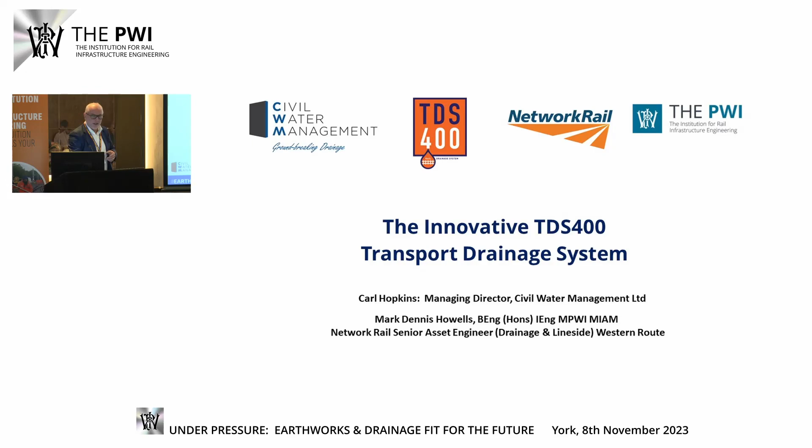So it's essential that you surround yourself with the right people. I have a non-exec director, Paul Withers, some might know, of HBPW Consulting, a risk accredited consultancy in Retford. And Paul is 40 years a chartered civil engineer. So straight away, any projects that come through to us, we will assess what those projects are and look at how we can value engineer with a potential new product that is going to change things. On a day-to-day basis, Patrick O'Neil, my technical director, has helped unlock what I'm about to show you.

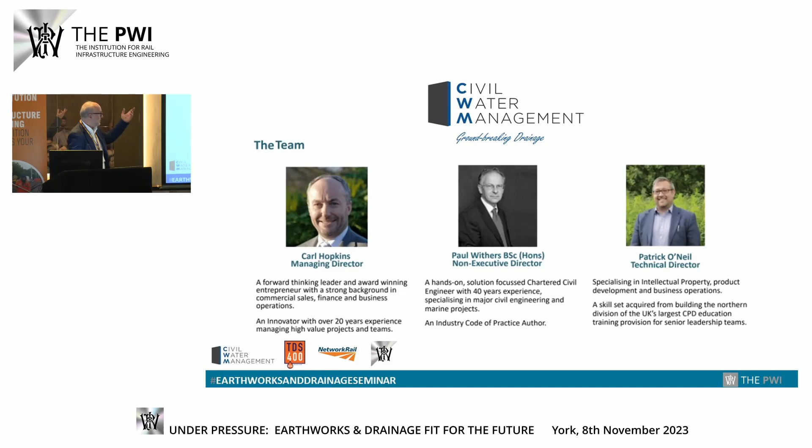So what is the cause of all this? Climate change. We've heard about it all morning. And the three key elements that I picked up on this morning were surface water, SUDS, sustainable urban drainage systems, and attenuation. And invariably, when we look at the track, and not just the track but off track, it's how do we divert water? How do we move water around when, in a lot of instances, you've got very narrow entry points? You can't always get a pipe in there. Pipes aren't always the answer to everything, and they can be very rigid in what they do.

So, as we see more frequent flooding, heavier storms. And when you look at that, and I saw some of the pictures that were shown before, the water can't get through the ballast. The ballast is silted up, stuck. Won't let that water through. So how do we release that water? Because there might even be good drainage systems in there, but it's just not getting to it.

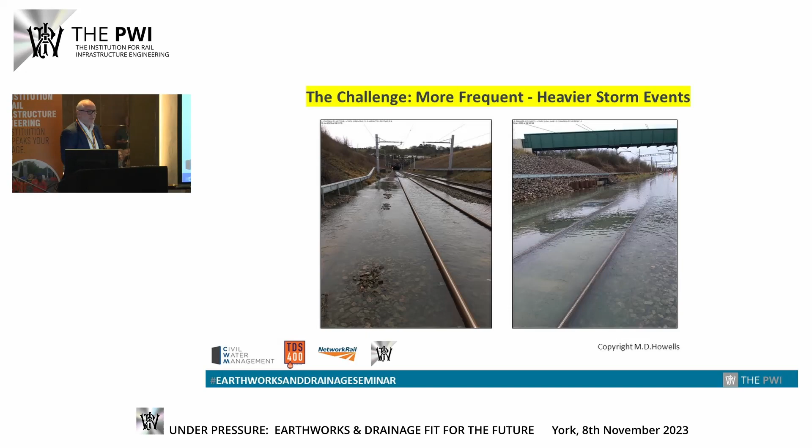Ta-da! TDS 400. I never travel anywhere without it. Especially when I was coming to York today, I thought it's bound to be flooding in York, so at least if anything happens, I can attach it to the soles of my feet and walk over with drainage flowing on the subbase, which is an apt point, because that is exactly what it's about.

It's about letting water through; it keeps an open pore, keeps that open void. So that's going nowhere. Okay, and you can put 1, 2, 3, 4, however many you need, and the K values and all the hydraulic information is all there to support it. So the water will literally, through hydraulic pressure, be forced through the panels and it meanders through. People go, doesn't it silt up? Well, the good news is no, it doesn't.

We've worked with academics. The Tuffley case study, which Mark is going to explain shortly, has been in nearly 5 years, and it is proven. This is just in the rail industry. I've been working with polymeric waste for over 20 years, and from the early prototype stuff, I've got stuff in the Olympic Park that's working as good today as the day it was put in. So some of those questions, well, we don't want to be first. Well, the good news is you're not. It's most important that we build on what we've done, and we do have good evidence.

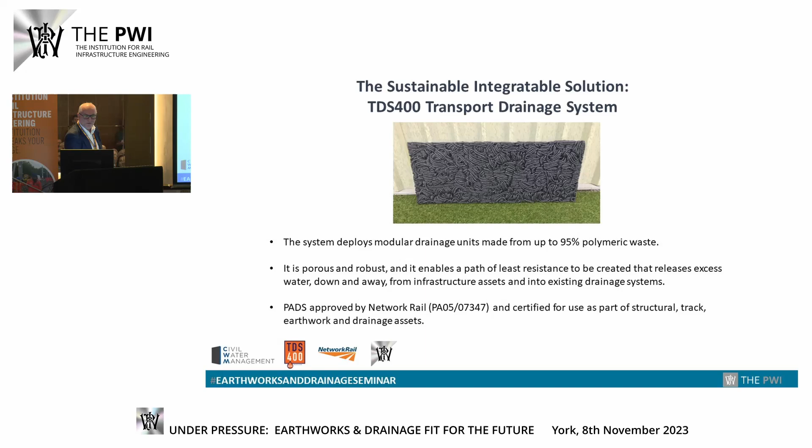But it's also really important that we look at how we work within the engineering standards. And it is absolutely about taking into consideration the existing drainage systems that are there. We are not about just saying that comes out and ours goes in. It's about how do we work with it? So in the examples where the water's flooding the track, you could insert TDS 400 in there and get the water to the drainage system without ripping everything out.

We can reduce trench sizes. A 600 trench comes down to a 300 trench. You think about that just in terms of excavation. It's immense. You're not having to use as much ballast. Ballast is massive on CO2. We've basically got a paradigm shift the other way because we're getting rid of what would normally be very difficult plastics that would go to landfill.

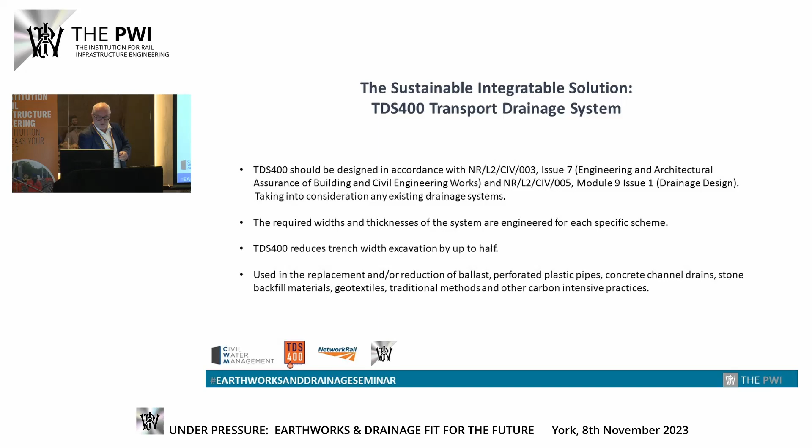So when children turn around and say, what are you doing in your daily activity about climate change? Well, I'm turning it into drainage. I'm doing it. This is live. This is happening today. Okay? It's really important that we see this action to impact on climate change. The recycled polymeric content: 95% recycled content, all UK sourced, which is even better still.

It keeps this open environment and it's all recyclable. And when you look at traditional excavation versus TDS 400 excavation, just in that 600 mil being reduced down to 300 mil, the tons of rail ballast excavated goes from 315 to 155. That's just excavation on that one bit.

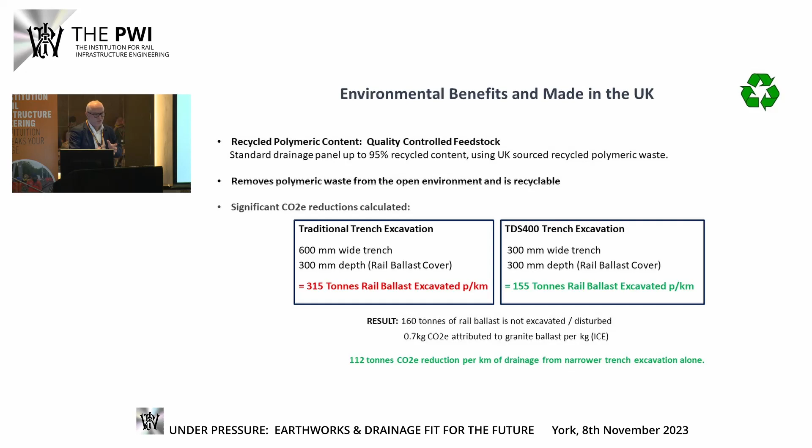When you start scaling these numbers up, the 112 tons of CO2e reduction per kilometre of drainage just because of reduced excavation. Massive impact. So if we look at the rail landscape, the important thing to us is how it's all connected up. We've got the drainage connectivity and the network resilience. And we basically split it into 4 key areas: the land boundaries and earthworks, the rail assets and structures, track and trackside, and track bed and formation.

So we cover many applications right across the network. But it's absolutely critical that you look at it as a whole. I'm not everything to everyone. TDS 400 is not everything to everyone. It is part of a new tool that you can put in your drainage toolbox and say, how about this? Because it might just add value to what we're doing, or it might actually just put some resilience into the network. It might actually bypass a failed drain without having to rip it all out.

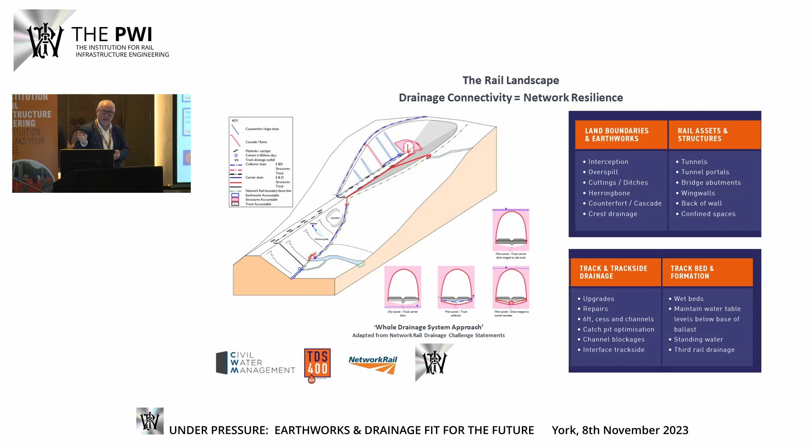There are different ways it can be used. It can be applied in all sorts of very successful interventions. So 3 sort of interesting points here. So the one on the far right there was Crewe, and the reason the panels are laid flat is that there were metal stanchions there and they couldn't get drainage through them. So what are we going to do for drainage? I said, well, lay TDS 400 flat. Because if I put that on the floor, the water's still going to go underneath it. It's going to travel through it. And actually right now it's solved a problem that they had in the area of the drainage.

I was speaking with the guys that put it in the other week. They said it's actually solved that problem. So they said, we're really grateful. He's now come back onto me again. Pill tunnel in the middle, that had big issues with contamination into local farmers' lakes. And by front loading and acting as a filter, we took a lot of the red oxide out. And so it's now clear. When we saw the bottles, they're absolutely crystal clear. The guys rang me up and said, I'd like to drink it, Carl. I can't, but I said I would like to drink it, which is really good.

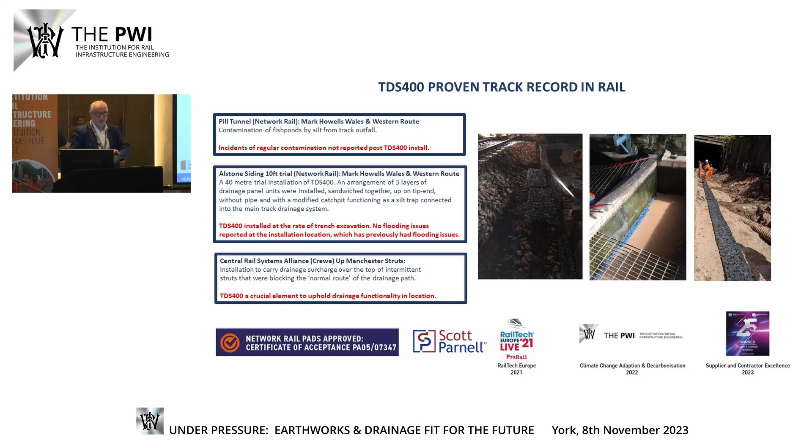And then these Central Rail Systems Alliance. Oh, sorry, that was Crewe. Alstone Siding is the other one. That's still an ongoing project. We put in a 40-metre stretch down there, which I think is on that slide there. And that was actually to look at lowering the water table, so a high flood area. So by getting the water down, basically putting the product on its tip end to get the water to lower, and that's still being monitored right now.

So in terms of cost-benefit analysis, 30% cost savings against traditional methods. If you used a ballast vac, it can be up to 50%. So depending on the methodology of what you install, it can really make quite a big impact in terms of the overall budget.

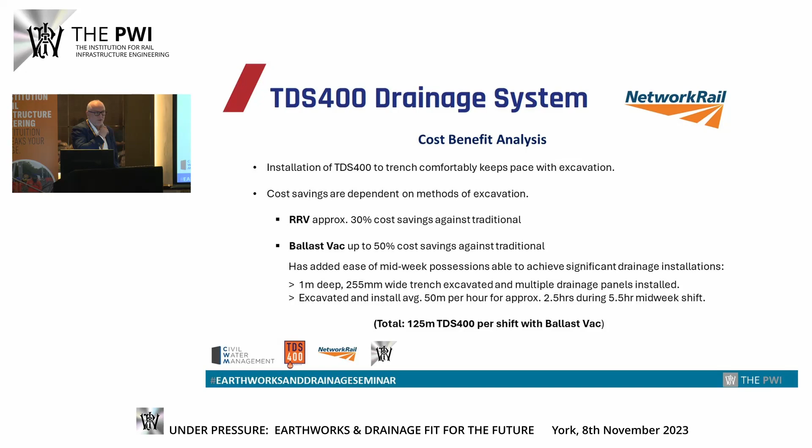So without further ado, I'll pass you over to Mark in 1 second, but just on the 650 metre stretch at Tuffley, which Mark's about to tell you about, if you actually extrapolated that out, a 33 shift cycle would come down to 7 shifts using TDS 400. And we noticed it literally goes in at the speed of excavation. So it was really significant in terms of how it can really take out a lot of cost. And more importantly, better utilisation of resource.

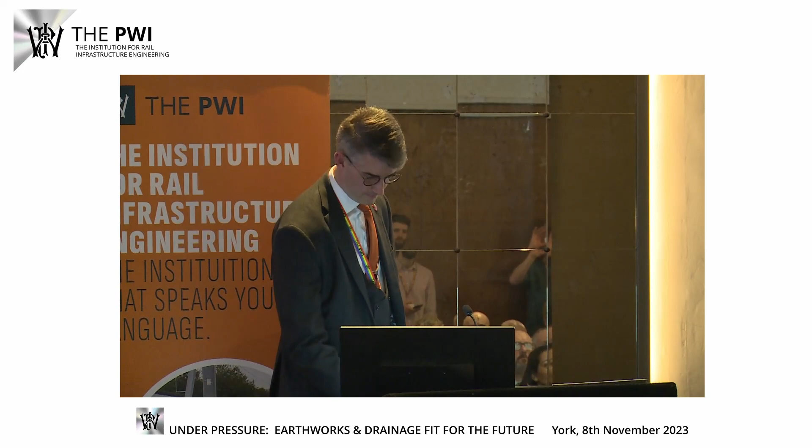So thank you, Carl. For those who don't know me, Mark Howells, I'm the Senior Asset Engineer for Drainage and Lineside on Western Route. I'm going to talk to you for a couple of minutes about an application of TDS 400. So, as Carl said, it's not the solution for everything. This particular site is near Gloucester, so it's on the Bristol to Gloucester main line. Nearly 5 years ago, we instigated this work. A failed drainage system that needed to be remedied. We needed to find a drainage solution to raise the line speed.

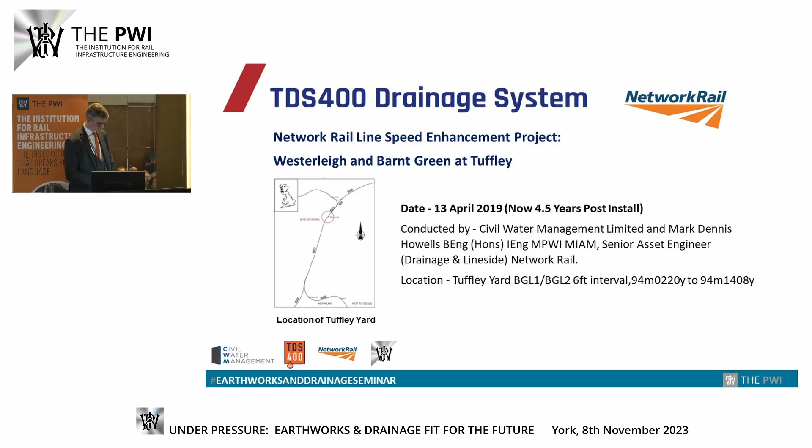So just thinking about the existing drainage system, we had a drainage system in the 6 foot between 2 lines. This is a very idealised cross-section. I didn't have time to whip up a section for Tuffley, but this gives you the concept idea that there are 3 layers of TDS 400 on their side, far on the right-hand side there, and a layer of TDS 400 laid on its side. So the drainage assets are in the middle. The concrete pipe protection blocks are there. In terms of photographs, it was not me that took the photographs on the night.

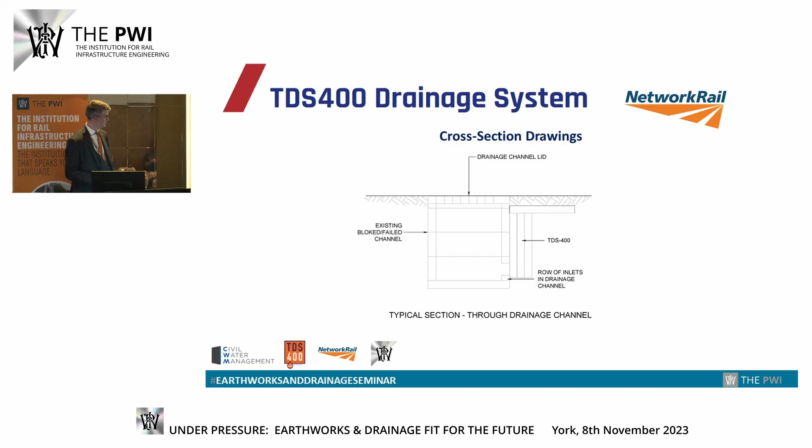I wasn't able to get there, but Sysrail helped Civil Water Management to install this. You can just about see on the bottom right of the picture that there are concrete pipe protection blocks. Now those are protecting the clay pipe that's already in the ground. Nothing particularly wrong with the clay pipe from the CCTV survey that we did, but water couldn't get to the drain. So that's where this product came in, and we were able to get water back into the drainage system.

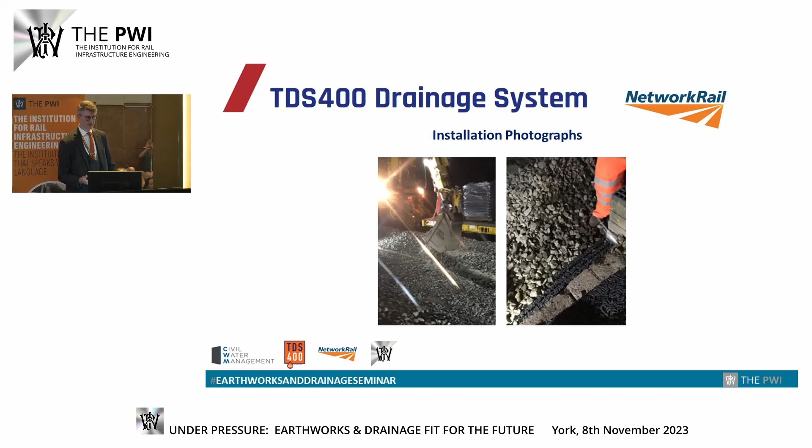You can see there the machine just taken off the ballast. Again, it could be delivered by hand. It doesn't need to be delivered by machine. Again, really good shots here of just that TDS 400 going in on its side, and then the panel laid laterally. So that's encouraging water to get from the formation into the drainage system, which is the concept here, is the idea.

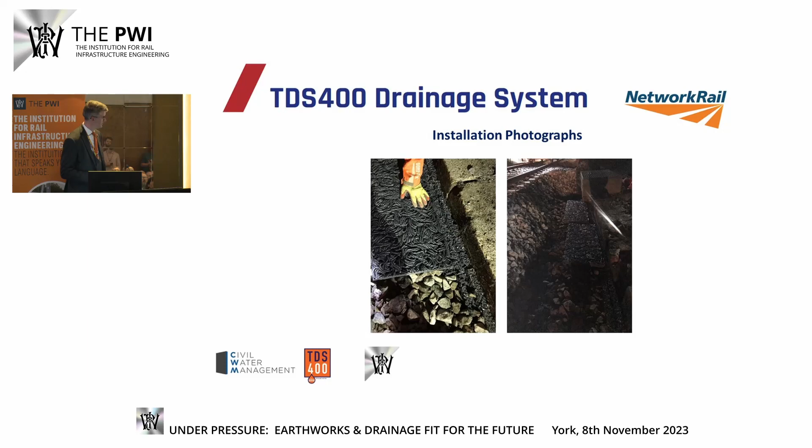In terms of just some of the site conditions, this was pre-work 2017, so it's been a long-standing issue, always been failed formation, very cohesive material, lots of clay fines. You can see that would clearly cause cyclic top. There's cant issues with cant being all over the place.

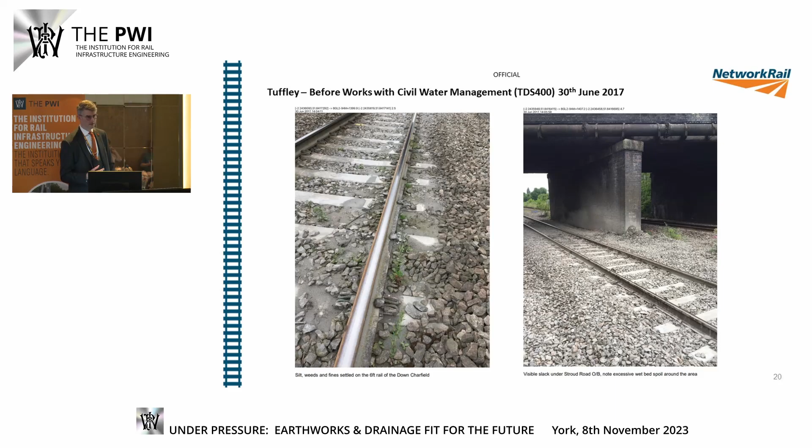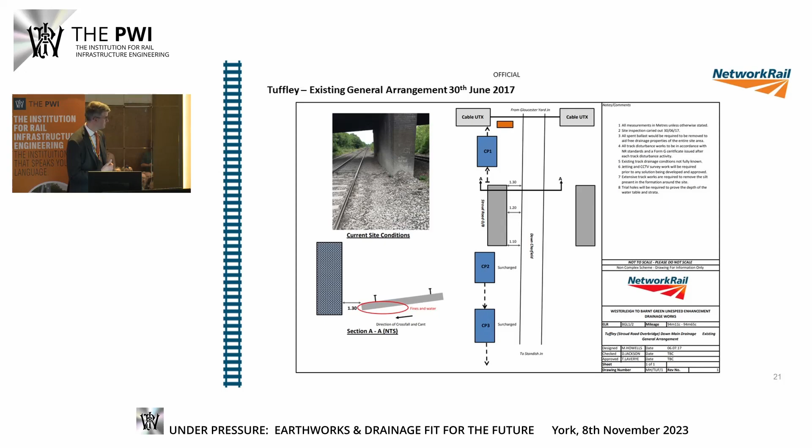Assets in Ellipse, for example, when we went back recently, double checking the asset condition, doing condition scripts in Ellipse, it's all part of the system. So you can see there, that's what we had. This is the site visit that I referred to just a moment ago, very recent with Carl. Unfortunately, we didn't get the line blockage that we requested, but we did manage to get to the side of the track. So you can see same site, same position, same sleepers, same components,

definitely different ballast. We've dug the ballast out, so the local P-Way team helped us dig out the ballast post the work. And since that time, 2018, we've seen no deterioration in the track. We've basically seen that actually doing this TDS 400 trial and getting water into that existing drainage system has helped to resolve the issue here.

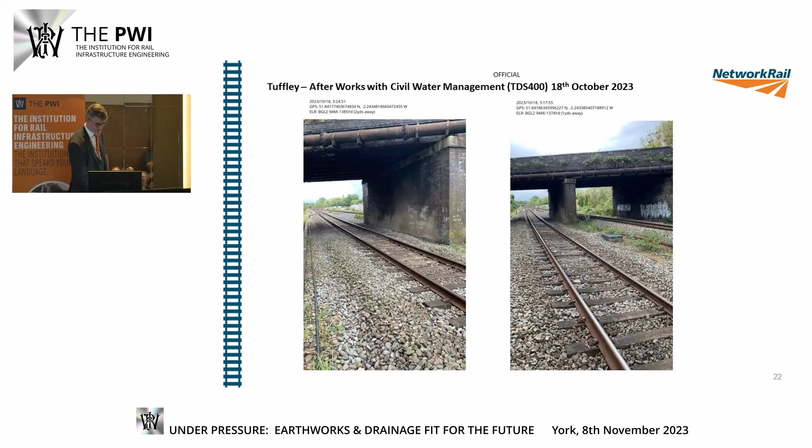Now, as Carl said, it's not for everywhere. It doesn't solve every issue, but I genuinely see it as an opportunity to help us where we don't want to just rip out the existing system. Think about the embodied carbon that we would have had if we'd have ripped this system out. By not ripping it out, we've saved a lot. That's kind of the summary of where we are. Track quality hasn't deteriorated.

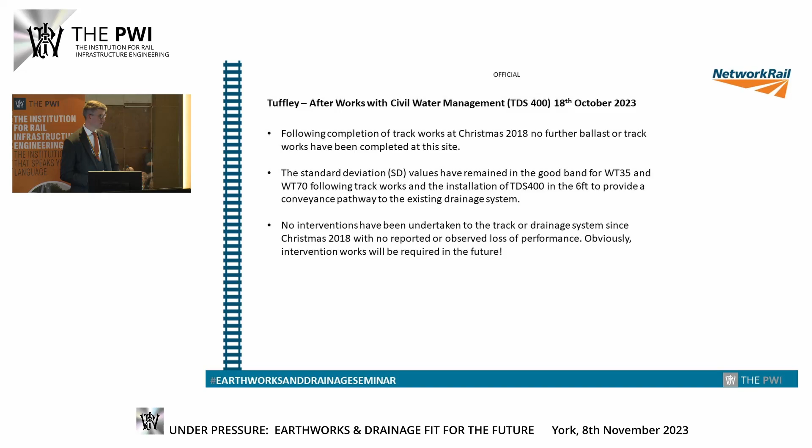Hopefully, we will see in the future that we can deploy this technology and this product more widely. But basically, although we've reduced, as Mohammed said in his presentation, the rate of degradation, there will always be a need for maintenance, there'll always be a need for inspection, but it's just trying to get the water into the drainage system, and it can help solve some of the issues. So I think, without further ado, I'm going to pass back to Carl, and thank you very much.

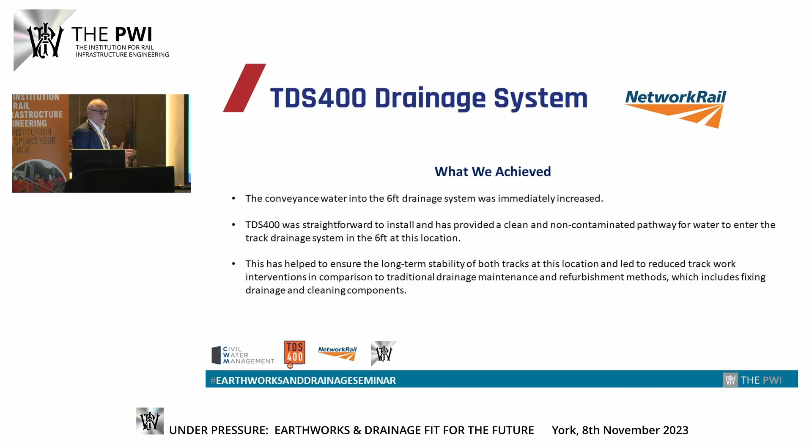So thank you, Mark. So really when you are bringing a new product to market and you can get into a trial like that, and just short of 5 years, we've really made an impact with what was a challenging wet bed without it being dug out. That's really quite satisfying.

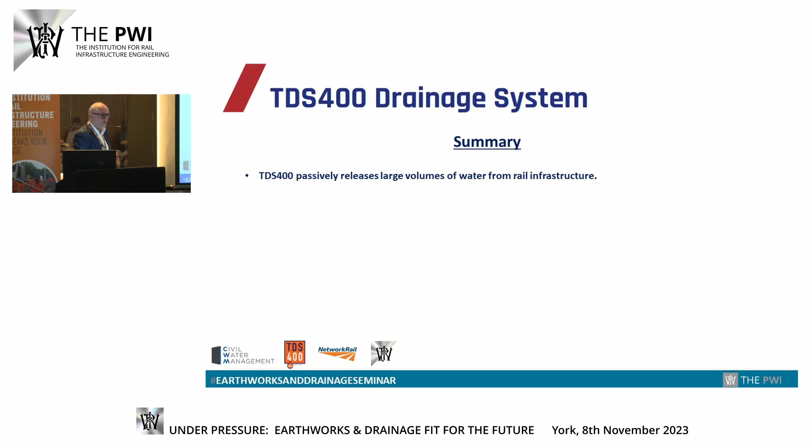This is the key point. It passively releases large volumes of water. So it's not waiting for a 100-year storm. It's doing it all the time, 365 days a year, 24/7. It's just moving that volume. It keeps those crucial pathways open, and it's constantly releasing that water, unlike a pipe, which doesn't.

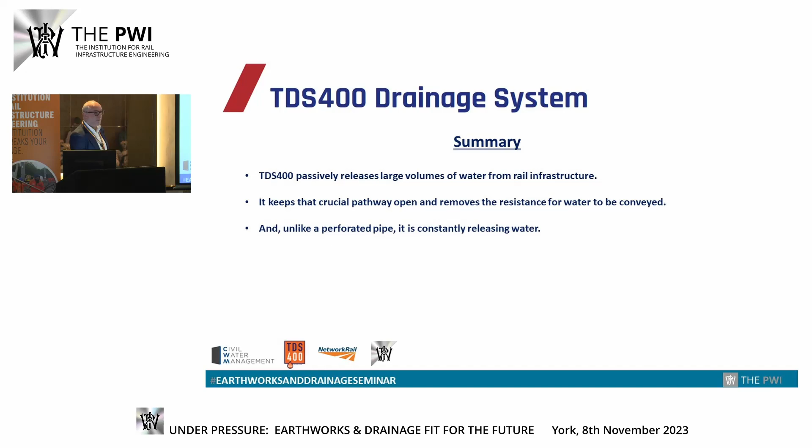We are passionate. You probably sense that by me. I'm very passionate about the environment. I'm passionate about drainage. God knows why, but I am. Whoever thought I'd end up in drainage, I've no idea. But we're passionate about the decarbonisation piece and helping the climate. If I'm looking for a legacy, my legacy is my children, my children's children, and their children's children, that they actually do have a future, that we are putting things in place now in our generation to make sure that their generations have got a chance.

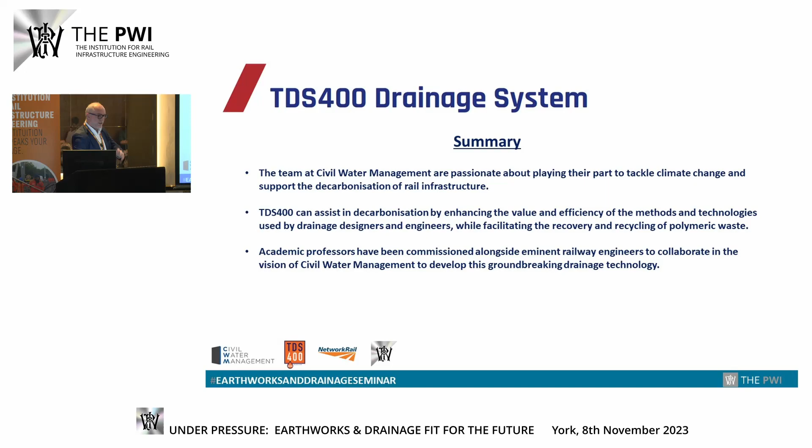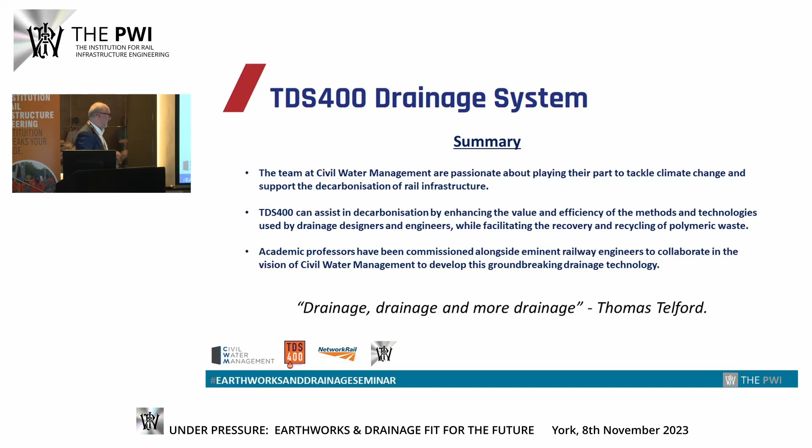We do work a lot with academia. We've got some great professors around us that have been advising us, and indeed more professors are working with us at the moment on different testings that we're doing all the time to constantly enhance and bring any findings into our spec, into making people aware so that we can get best value out of it. And in the words of Thomas Telford, drainage, drainage, and more drainage.